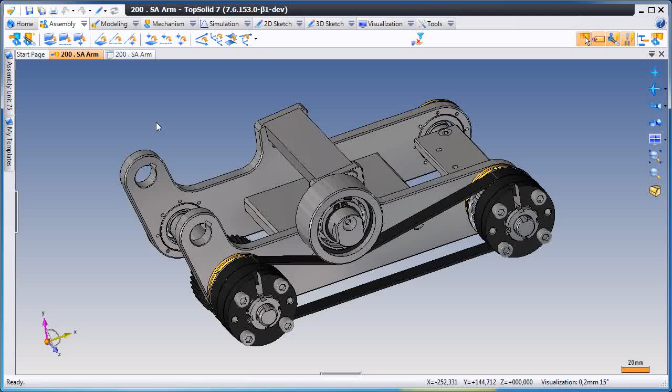In this video, we're going to show you how to make an assembly drawing. Here we'll just right-click on the assembly and choose Make Draft, and like that, we'll drop the component right into our draft document. Here you can see how easy and fast it is to generate your assembly drawings.

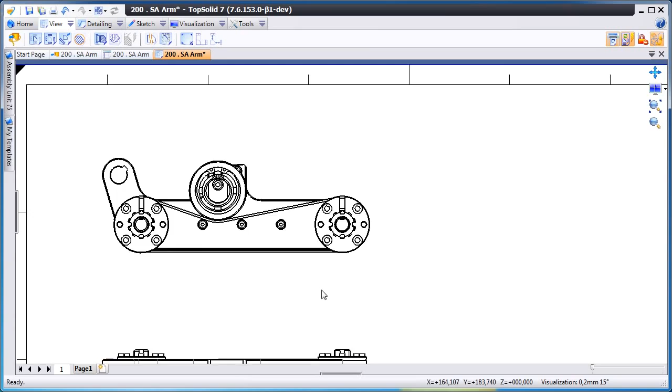Maybe we've decided we don't want that drawing, so we'll go ahead and delete that view. We're going to zoom up here and ask the software to generate all of the axes for us automatically, and maybe the reason we wanted to do this is because we wanted to quickly create a section through one of the center lines of those axes.

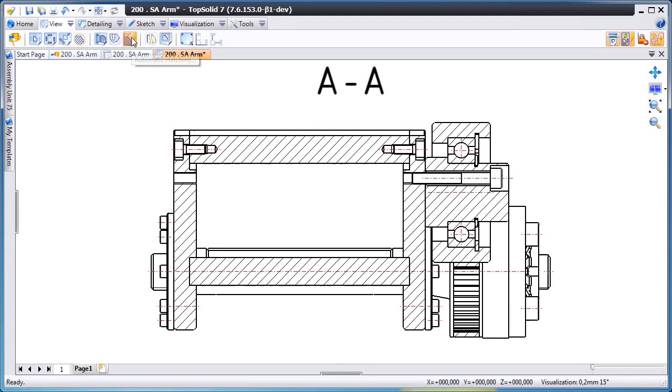And like that, our section is complete. Next we'll ask TopSolid 7 to generate the axes even on the section view, and hopefully this is illustrating that TopSolid 7 does a really good job of adding axes only where they're really needed. Now we're going to add a couple of fast dimensions.

We'll add another one from there to there for the plate thickness. But you know what, that plate thickness is pretty tight, so we're going to ask for a dog leg just by right-clicking on the leader, and adjust it so it looks nice.

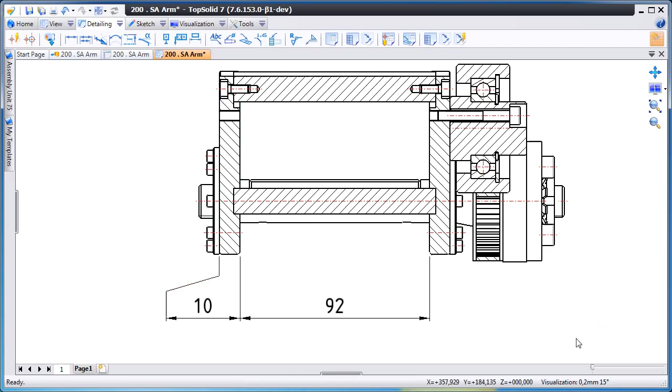From here, we'll zoom out, and maybe we want to create a local section of this bearing element here. So we'll go to our Views, Local Cross Section, and we're going to just start creating a spline around the area that we want to section.

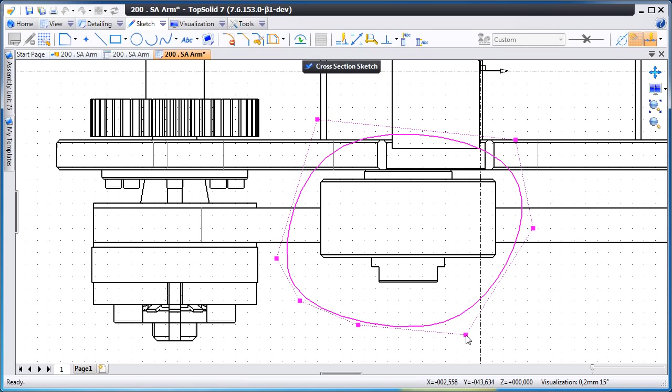We can grab the control points of the spline to make sure that the area is fully surrounded by our spline. Exit out of the cross section and then select the object we want to section to. Now here TopSolid 7 will dynamically adjust within that closed spline to the center line of that object we selected.

And now we're going to use a function called exception. Here there's a part of this local section that we don't want to crosshatch. In fact, we don't even want to cut it.

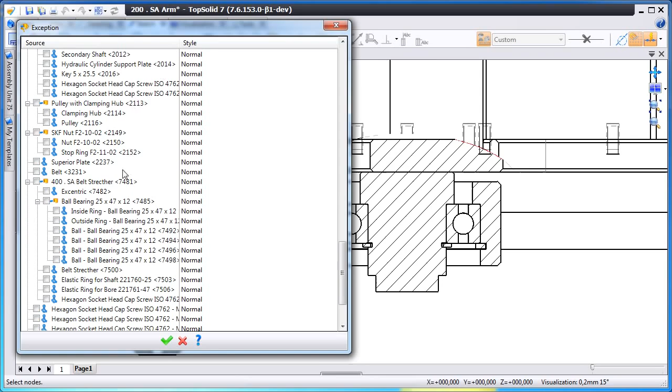So we're going to select the subassembly and using our up and down arrow keys, find the component that we don't want to cut and set it to don't cut. And like that, once we validate, you'll notice that it removes that from that local section.

Next, we'll add some more axes. And here we're going to do some manual axes just to show you that you can just get the axes for the objects you want.

And now maybe we want to do an axis between elements, so we get the center line. But now we've decided that center line axis isn't long enough, so we're going to choose the object to which to extend that axis. And again, the goal here is to show you how fast you can set your views

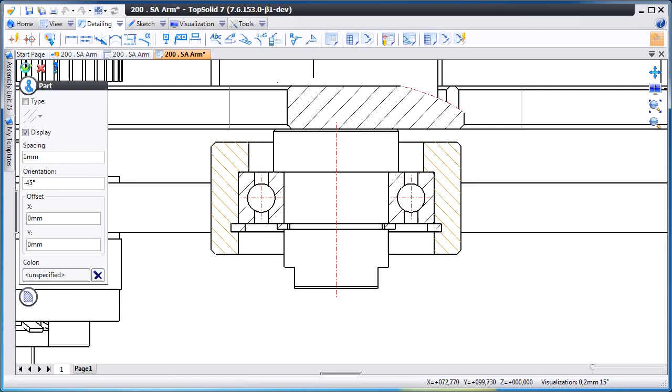the way you want them and add the dimensions that you want to add. Here, we just right-clicked on one of the cross-sectioned areas, the hatching pattern, and we'll locally modify it. It almost seems like everything is a right mouse button click away.

Next, we'll add a dimension from that edge to that edge. TopSolid 7 is smart enough to know that that's a diameter and thus creates a diameter dimension.

From here, let's create a bill of material. We'll choose bill of material, pick the two hooking points, and like that, our bill of material has been added.

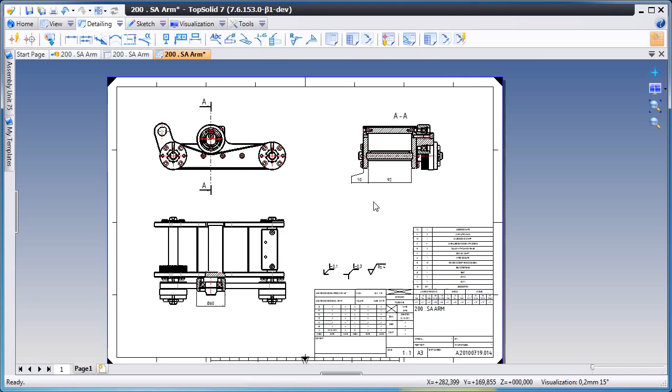The only thing left to do here would be to add some balloons. So we'll choose automatic balloon indexing, we'll choose our view, and like that, TopSolid 7 does the hard work for us and adds the balloons.

Let's add some balloons down on this view as well. Perfect.

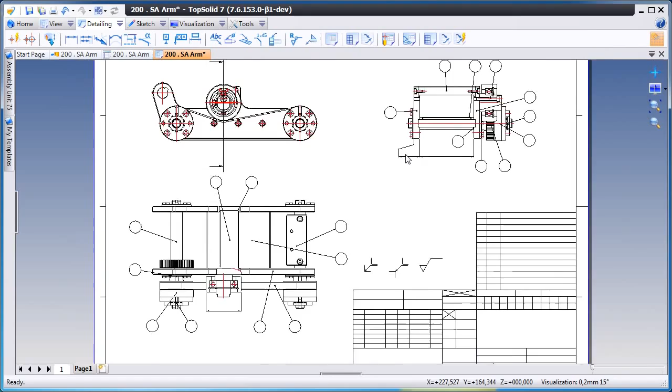Next, maybe we'll go down to the title block and fill out some of the information down there. For example, how many of these do we need to manufacture?

And all you're doing is double-clicking on these objects to edit them. Very simple. Here we're entering the name of the person who created this print and the date at which they created it.

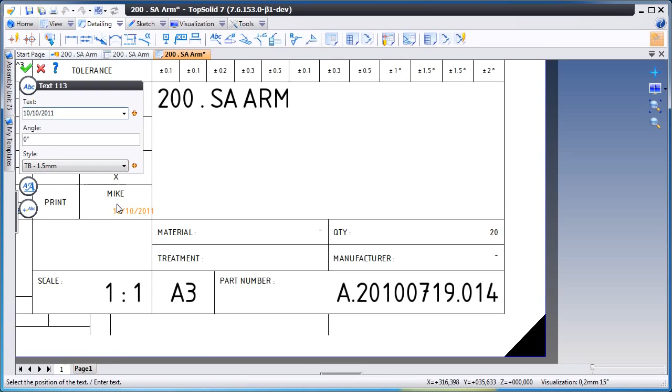And like that, our assembly drawing is complete.